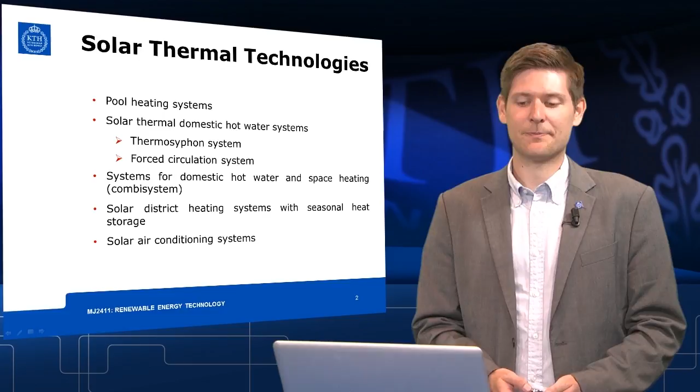Within this video, we're going to talk about pool heating systems, solar thermal systems for domestic hot water heating, and also for the heating of the houses. We're going to speak about solar district heating systems with actual seasonal storage, and as well, very briefly about solar air conditioning systems. I've already shown this picture in previous videos.

We can use unglazed solar collectors for pool heating. This is a very simple system. We are using a very simple solar collector, the unglazed solar collector, which is able to heat up the pool whenever there's sun available. You're having a solar fraction of around 100%. So you're going to use the solar energy when it's available and do not use any other means in order to heat your pool.

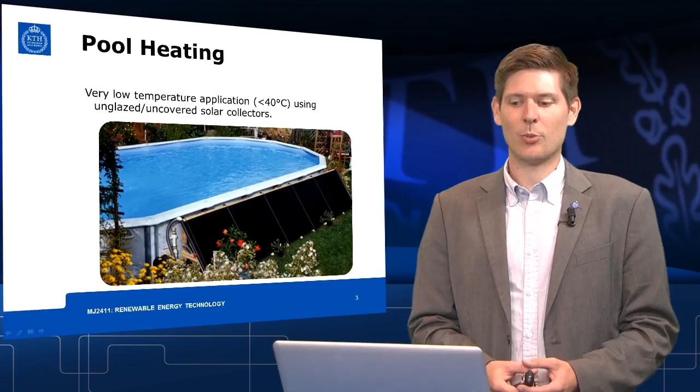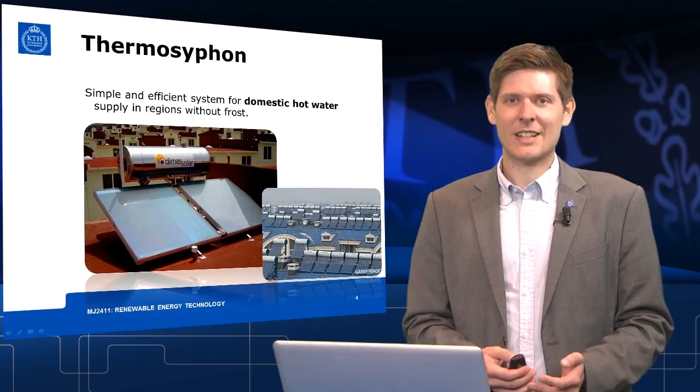Another very simple and efficient system of integrating a solar collector into a bigger system is the Thermosyphon system. These kind of systems are widely used in regions without frost. If you look at how a Thermosyphon system works, you can see there's a solar collector at the bottom, which is connected to a hot water tank, which needs to be placed above the solar collector. As I said, it is a very simple, efficient, and also a cheap system where no electricity is needed in order to pump around the water.

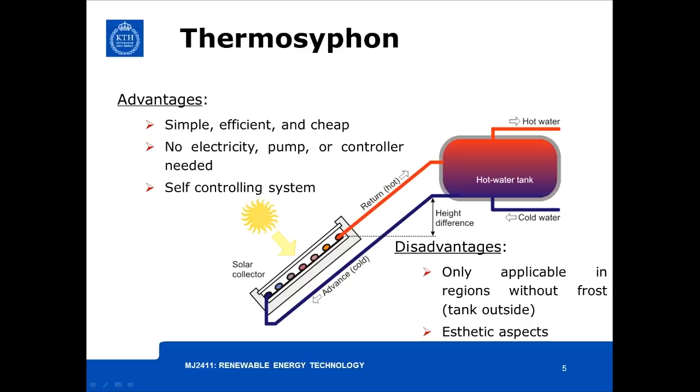Water is simply circulated within the solar collector and the hot water tank by different densities of the water, by the buoyancy effect of water. We do not need a pump, therefore, and also no controller is needed. The disadvantages of these systems are that it is only applicable in regions without frost. We need to place the hot water tank above the solar collector, and the solar collector, of course, is outside the house, so the hot water tank is also placed outside of the house. This means you cannot use it in regions with frost, as the hot water tank would actually freeze.

Additionally, some people would claim that it does not look very nice. It's not very aesthetic to have hundreds of thousands of Thermosyphon systems on top of houses. In the next video, we're going to speak in more detail about how to actually calculate a Thermosyphon system.

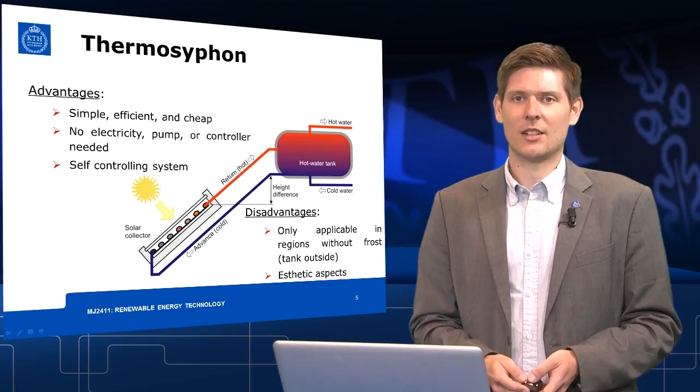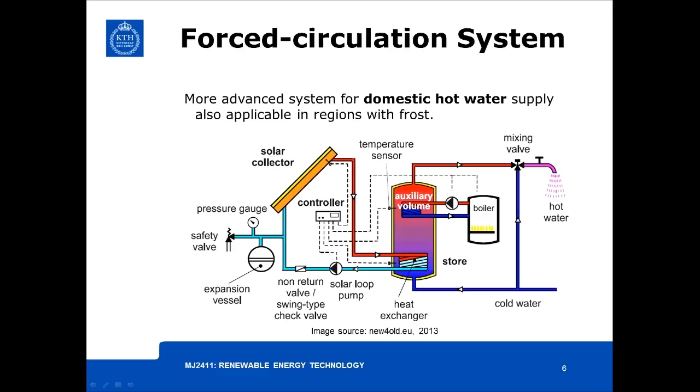A more advanced system to actually produce hot water is the forced circulation system. It is a more complex system where we use a pump to circulate the water between the solar collector and the hot water tank. We are also able in this system to use an auxiliary burner to heat up water when there's no solar radiation available. This system can now be used also in regions with frost, as the hot water tank can be placed wherever you want. You are using a pump to circulate the water anyways.

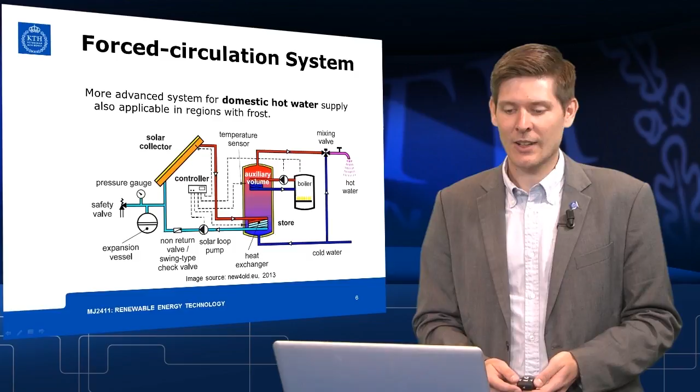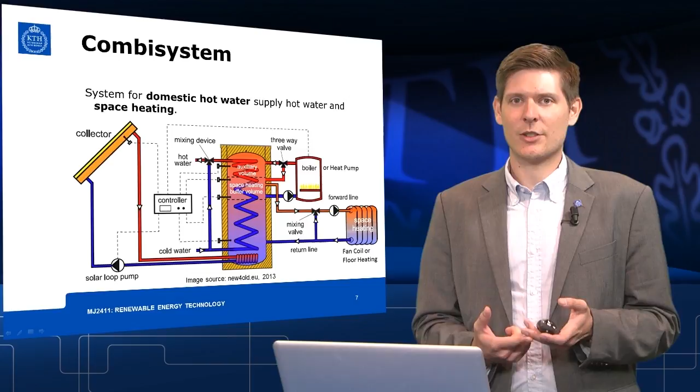An even more advanced system is the Combisystem. In this system, we're going to use the solar collector in order to heat hot water for domestic uses and also in order to heat the houses. And finally, we can combine many of these solar collectors on different houses to a very big central storage tank. Then we're speaking about solar district heating.

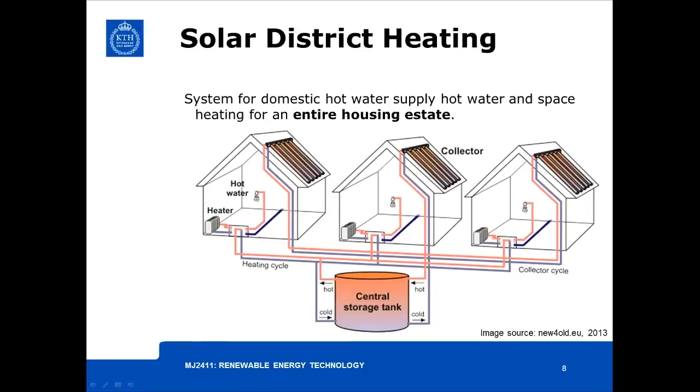This is applicable for entire housing estates and has the advantage that the surface of the hot water tank, with respect to its volume, is going to be smaller if you use one central hot water tank compared to many, many different hot water tanks in each individual house. Disadvantages of the systems include, of course, higher losses within the piping and a higher initial investment.

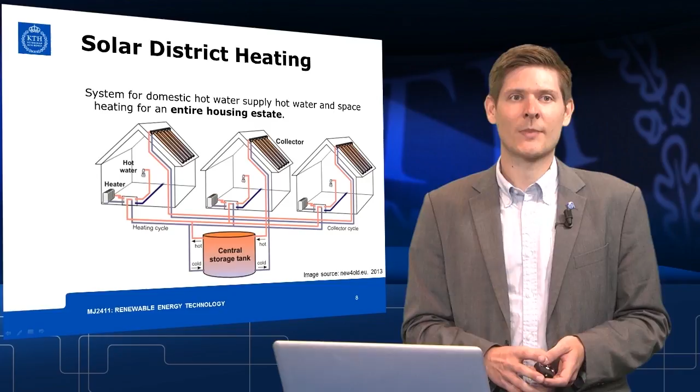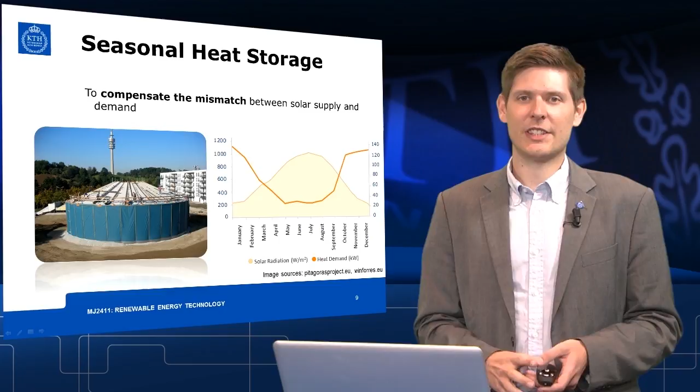And now, if we look at when do we actually need solar heat? Usually we want to heat the houses during winter, and we have lots of solar radiation available in summer. In order to compensate for this mismatch between the demand in winter and the availability of solar radiation in summer, you can build a seasonal hot water storage. It can be seen here in the picture. It's a very big tank where you can store hot water over a couple of months. The main disadvantage of this system is quite obvious. The tank is relatively big and you need a very big initial investment.

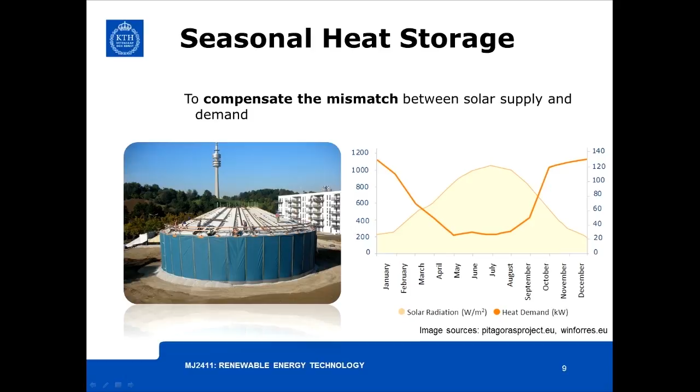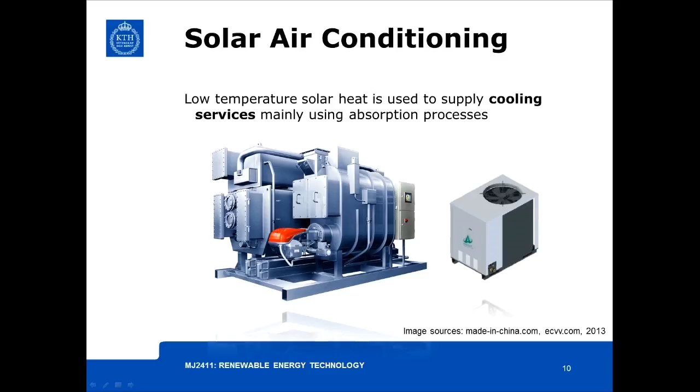Finally, you can also use solar collectors to provide low temperature, low grade heat in order to create solar air conditioning. These processes usually involve absorption processes which use the low grade solar heat to convert it to cold.

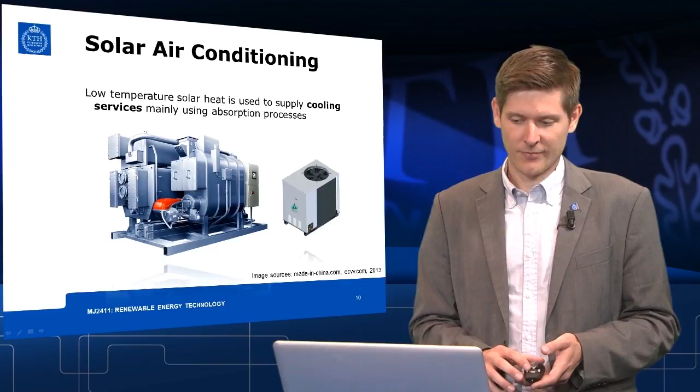Thank you very much. This was low temperature solar thermal power systems, where we spoke about the integration of solar collectors into bigger systems. In the next video, the last video of this series, we're going to talk about some guidelines, some help for how to calculate thermosyphon systems or solar collectors in general.